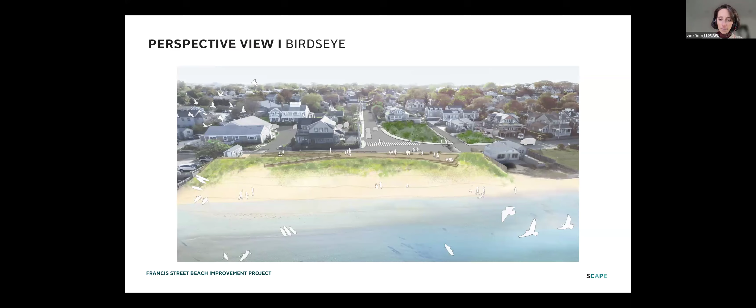Just going back at the plan, I'll pause here and let you all comment if anyone has any comments, questions, or if Laura or Kate have anything to add about the design. But that's kind of where we are today.

I would just add one nuance: if you click to the prior plan, Lena. So one thing we were discussing last time, you see how on the left side of the screen the boardwalk swings out and starts to go closer to the water. We fine-tuned that a little bit for a couple of reasons. One, to give a little bit more breathing room and flexibility for potential future connections, so it's not quite so tight, both with the stair and the edge of the boardwalk up against the neighbor's property. So you get a little bit more dune restoration planted buffer in between that existing fence for the near-term condition.

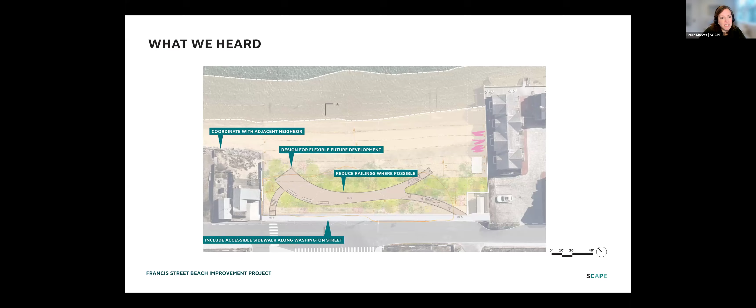It also better sets up a potential future extension if that's desired, that would be in an alignment that works with best practices for grading of the dune and alignment of the boardwalk. So if you click forward, you see that left side edge of the boardwalk is still offering flexibility in terms of how an extension could happen, but pulling back a little bit more roadside to stay out of the resource area as much as possible.

So yeah, we'll just pause there. The next piece is talking more about stormwater. So just pause there. Any thoughts or comments as we advance the design?

The right mix. What did you say, Nat? I said, I think we found the right mix, although this next thing looks different than the last one. So what are we doing now? Or is that something else? This picture that you just...

This is just simplifying the roadside edge to be more of a straight line. The reason for that is more constructability. It's going to be easy. We maintain that kind of sinuous curvilinear feeling towards the water side, but it makes it a little bit easier for construction and also for pulling the boardwalk back towards the road as much as we can while still creating that kind of buffered edge.

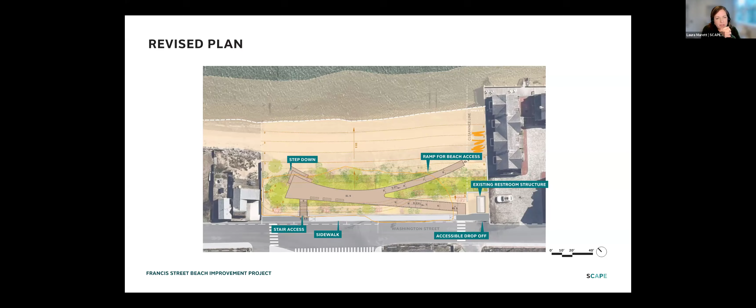So if you go forward to the images, I think the Francis Street beach view or the Francis Street road view is helpful just to get a sense of what you're seeing. So you'd see the boardwalk kind of floating above that restored dune, and hopefully still have that view to the horizon and the water beyond. So we're just fine tuning the way these two systems - the dune with its optimal grading and the boardwalk with a nice combination of simplicity, constructability, and that nice curve swoop - come together.

It's all warm. It's all done, you know. Clearly. Are you, well, thank you. I mean, you've made it through the comments phase, apparently. You've survived the comments phase, and apparently everyone is pretty happy with this. And okay, cool, we fixed the bathroom issue, the secret bathroom from 19, whatever year. It's there, we have it, so.

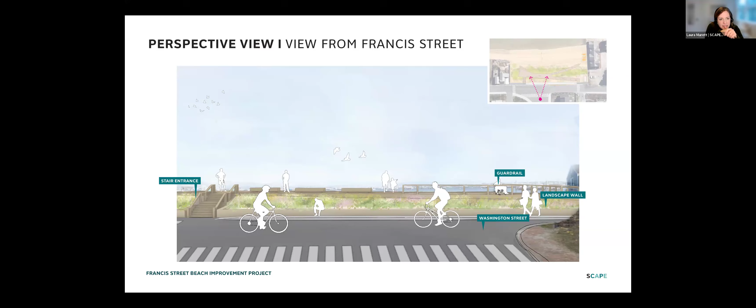And I like the connectivity piece and having a way to step down from those spots is important. Maybe click back one, Lena, so we can see that view. It says that in the last slide, right? Mhm, step down. So in other words, where it's gonna end isn't just gonna be like Route 93 in 1975, right? Exactly, forever. It gives you a connection down.

A set of stairs that can be removed if and when the day comes to add more, finish it, or go to the next parcel. Okay. And I think these beachside stairs could remain, we can look at how they align on the neighbor's edge, but I think it's nice in terms of, we were really trying to think about what is the optimal view as you're looking out towards the water. Obviously, you don't want to be facing too much back towards the bulkhead at the neighbor property, but more out towards the water and towards downtown. So I think starting to get there. Can I ask you? I just thought of something.

I can't remember how it was worded in the previous slide about more benches, less fences, or whatever. That's good. Having benches is better than having just a fence and bench, right? Because the benches are acting kind of as a fence a little bit. You want to have as much sitting area as possible, because that's going to be the most important thing.

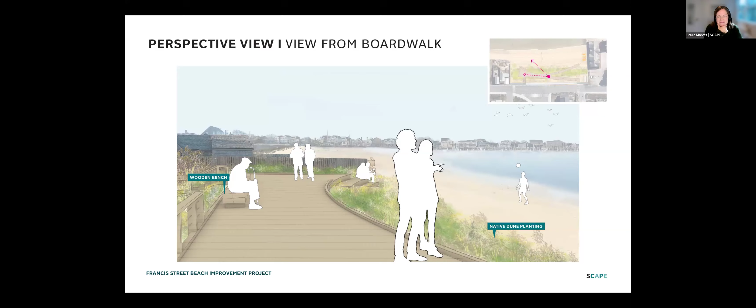Today we scheduled a meeting with Chris Wolf, who owns Put In and the Cuddy, the adjacent abutter there. So we'll be meeting with him in about 10 days to see what he's thinking for adaptation and how he could tie into the project before we finish this 30% design phase. I think he seems really interested, which is great. Great.

We've been able to get some stormwater modeling done here. I'm sure almost everybody on the call is aware of what we're doing, but just as a high-level overview, here in Washington Street, our main modeling goal is to characterize the extent and depth of street flooding, look at how the drainage system modifications we're proposing would impact that flooding, and then look specifically at if rain gardens or similar infrastructure would help alleviate that flooding.

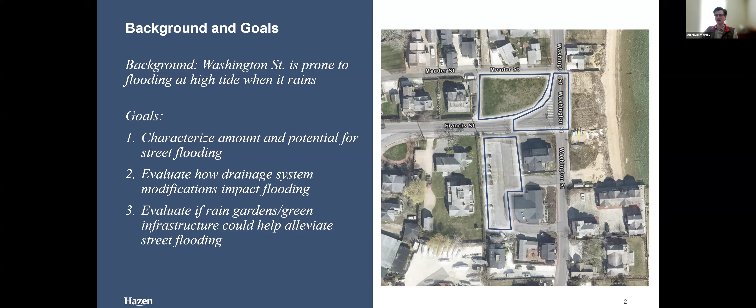I want to highlight that we're looking at flooding specifically when it rains at high tide. That's the condition under which flooding seems to occur now. It's also more similar to future conditions where sea level is higher, and it could be that rain at not-high tide would cause flooding as well.

We've done a number of scenarios already. Scenario 1 is the system as it exists today. Scenario 2 is the same, but with tide gates on the outfalls on Francis and Meader Streets. Scenario 3, we did 2 versions, but it essentially includes a little bit of stormwater drainage infrastructure and the rain gardens themselves. We'll see that in a minute.

Our modeling approach, by the way, everybody please feel free to shout out and stop me if you have any questions along the way. Our modeling approach is utilizing industry-standard design storms, which are appropriate for this geographic region.

We're modeling only 24-hour storms. We looked at the 1-inch, 3-inch, and 5-inch 24-hour storms. Those correspond approximately to a 6-month, 1-year, and 10-year storm respectively. We also looked at the 2-inch storm, which is like a 9-month return period, for the rain garden scenarios, just to dial some things in.

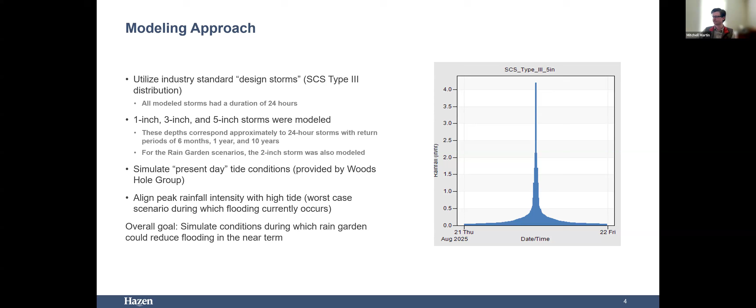As I mentioned before, we were aligning the peak rainfall intensity. You can see the graph of rainfall intensity for a design storm on the right on the slide, aligned with high tide, which is the worst case scenario.

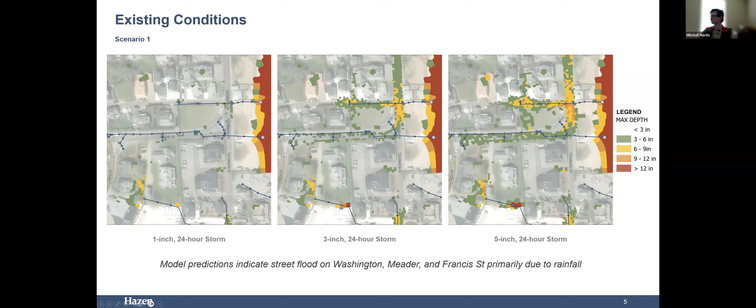Under present day conditions, there's not a terrible amount of flooding for a 1-inch storm, with a little mostly nuisance flooding at the intersection of Meader Street and Washington Street. For the 3-inch storm, approximately a 1-year storm, flooding gets more severe, with some pockets up to a foot. And for the 5-inch storm, the flooding is significantly worse, with some serious traffic impacts almost definitely.

This is that same 1-inch storm, just larger. We can see Francis Street, Meader Street, Washington Street—all the main streets here—are perfectly passable in this condition. For the 3-inch storm, not so much. For the 5-inch storm, definitely not.

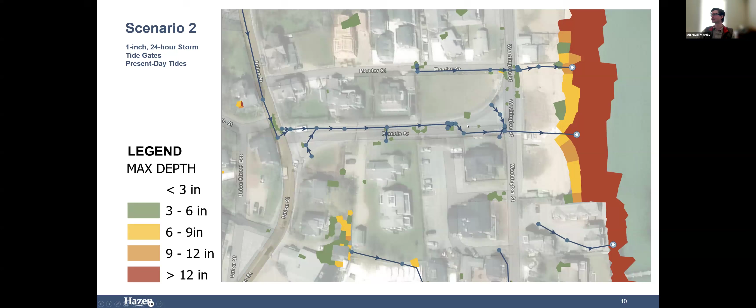This is those same scenarios, but with tide gates on these 2 outfalls. Under these conditions which we modeled—these storms without storm surge, with present day tidal conditions—the tide gates don't seem to have any real effect on flooding. You can see that these results are broadly identical. That, of course, will change with future tidal conditions if the tidal conditions are higher. Again, we can look at them one at a time here and see basically the exact same things.

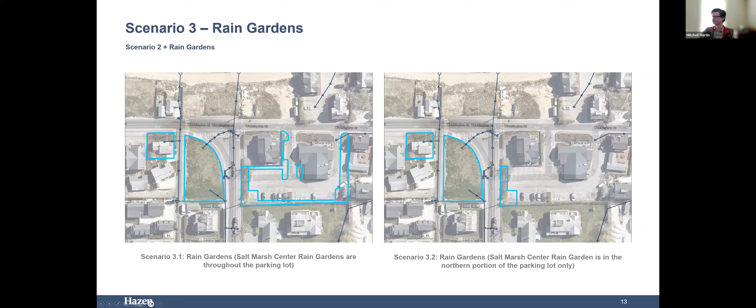The way that we modeled these is quite optimistic. We took the best case scenario side slope if you were using earthen slopes, and assumed no decorative stones or decorative grading inside these structures, so they're just prisms. Then using the boring data from Tighe & Bond from last year, we took the highest groundwater elevation.

Used that as the bottom elevation for all of these rain gardens. For the purposes of modeling, we didn't include any infiltration during the storm. That's a common industry practice. Generally speaking, when you have a rain event, the groundwater is also going to be quite high, so we are assuming that during the storm itself, you're not going to get any water leaving these rain gardens into the ground, which is slightly conservative, but standard.

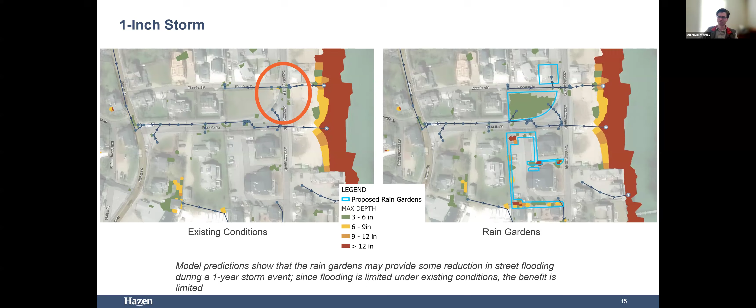It is a little difficult to see here, but if you look specifically between Meader Street and Washington Street in this intersection, you can see that there is some reduction in flooding extent. And there appears to be an even larger reduction in flood volume, but to a small extent, which is quite diffuse.

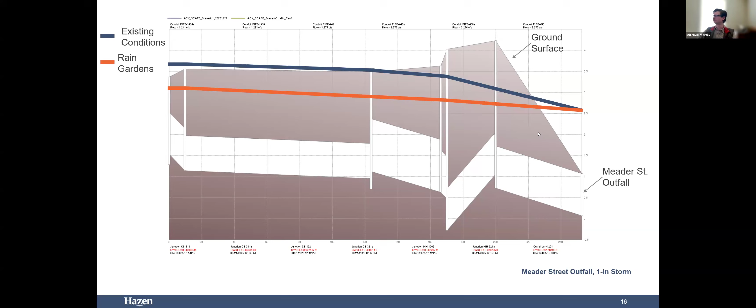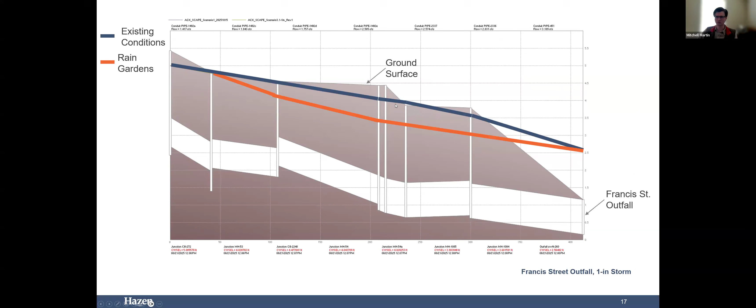This is actually a great result for the 1-inch storm, and very similar results here on the Francis Street outfall, where it's quite close to the surface in some places, but you get almost half a foot difference in a lot of other places.

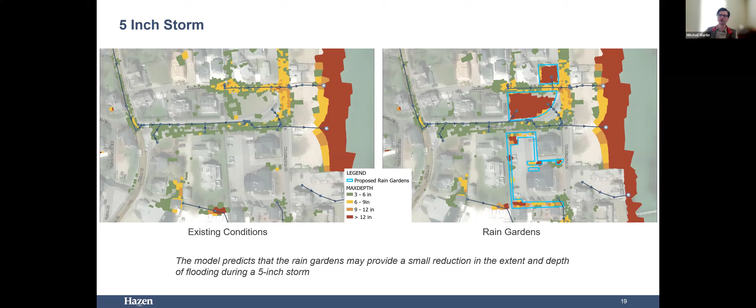Now, the reason I didn't show profiles for the 3 or 5-inch storm is because the surface flooding is pretty extensive for both of these storms, and there is still an improvement in terms of the hydraulic profile, but it's a lot harder to interpret because there's a lot of overland flooding that can interact that way.

As I was saying before, the smaller Salt Marsh Center rain garden ends up having essentially the same benefit to the rest of the system on Meader and Francis Street. It does, of course, make some difference further down Washington Street, down on these maps and in these pipes over here. But that was sort of beyond what we were looking at in our modeling.

The overall message is basically that these rain gardens, especially the ones on Francis and Meader Street, have the potential to decrease the depth of flooding and the extent of flooding some during smaller storm events. They have a measurable benefit for larger storm events, but it's not necessarily one that would be appreciable to someone physically there in person.

The Salt Marsh Center parking lot rain gardens, having a little bit of storage, especially along Francis Street, looks to be beneficial, but going above that, it doesn't significantly impact Francis and Meader Street.

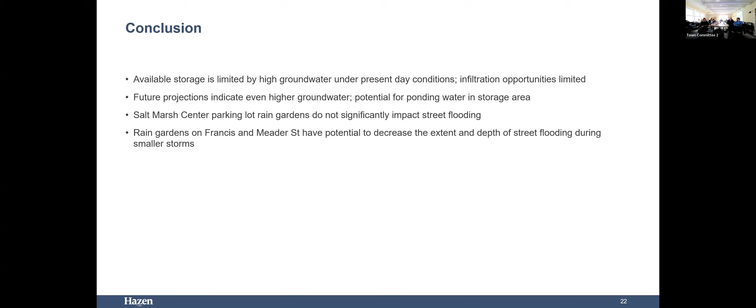Question: how does the water get into the storage at the Salt Marsh Center? Does it roll in off the because that's higher? Is it rolling in from the parking lot or?

Correct. The Salt Marsh Center rain gardens are, as you can see, so these points and lines represent manholes, catch basins, and pipes in blue. There's connections for these other two rain gardens into and out of the system. For these, the actual surface elevation is higher than Francis Street. So any water that's coming in here is originally either falling on the roof of one of these buildings or it's falling on the parking lot itself and running off.

Joe, go ahead. Yeah, thanks. Mitch, I think I noted in your maps and what you were saying that in some of those larger events, while the extent of flooding might not change that much, the volume was a little bit reduced when you had different levels of rain garden interventions. Do you have any sense of the flooding that's still going to occur on Washington and Francis? Is there any effect on drainage time for those areas that are going to be flooded in the road?

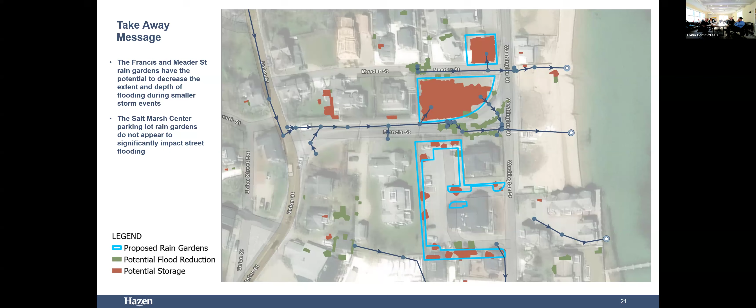I didn't see that. And the question I was asking Dwayne also is when they show the Washington Street where the flooding is, that kind of rings true to me, but I'm not down there as much. When they're showing these, it's kind of around the corner. That is kind of what I'm seeing. Nat knows it comes up through the catch basin first, so that's important. Okay, they know this though, I think, Laura.

Yeah, I feel like we're talking about a shorter term benefit as the town mobilizes for pumping and a longer term strategy. So it's a question of how you want to invest in this, right? But there is some short-term benefit for the smaller storms. And Todd, I see your hand too. You want to chime in on that? Before he does, that's not dissimilar to the approach that we're taking from the coastal side too. We're not trying to solve every single major storm. Yeah. I don't wanna talk over everyone, but what Dwayne just brought up.

Okay, so the catch basin, I know we're not on Easy Street, but I have to say this because this is what happens. The catch basin in front of LeMaitre's little store, whatever we're calling it this week, that store changes a lot. That catch basin is where the water comes out. Because the outfall part, when the water gets high enough, the weight of the water, it's just like you could take a clear hose. It's not really complicated science. You don't have to go to college to figure this out. And the water pushes itself out of that catch basin because it's so low.

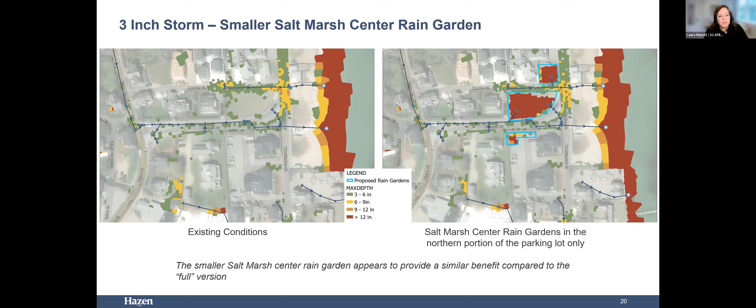I could jump in there. So what Mitch and Ben and the team did for this initial run was a very simple maxing out: if you went from the edge of the space on a 3-to-1 slope down as low as you can get it while being above groundwater, what storage can we get?

So from a design perspective, with your direction today, our next step would be to say, okay, we want to not just make it a ditch, we're going to finesse the form a little bit to make it more attractive, to think about areas where we want plantings up a little higher. So the manipulation of the ground will reduce somewhat the capacity.

What you're seeing here is a maxed out capacity if you just took as much water as you can into these spaces. So we'll be able to do another model run once there's a refined design, provided you want to continue to advance this study. Does that answer your question, Leah? That covers what has been said, I think. What Dwayne said, pretty much.

I had one additional question. My question is about predictions on water levels and groundwater modeling. I just wanted a bit of a refresher on what's been done in this area and what the expectations are for low, medium, high sea level rise and impacts on groundwater, or other potential impacts on groundwater.

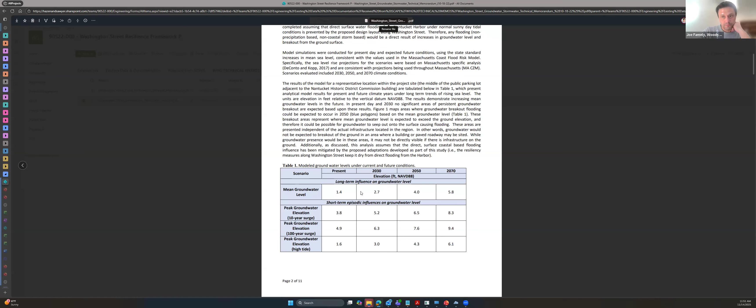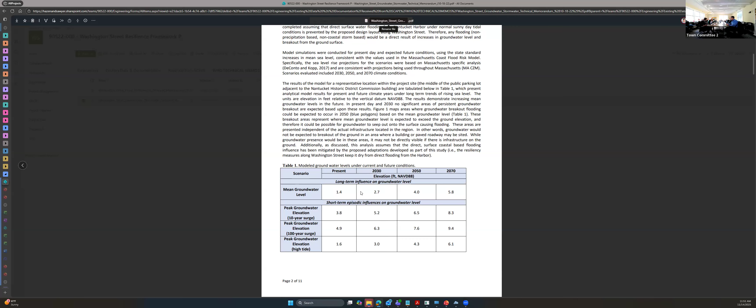The boring locations, do we have monitoring wells installed there now that we can access? We do? Where are they? They're up the land, like the bank. I don't know where they are either. We should go for a tour. There's one right here, and then the other boring was here, and there was one in the parking lot, but I think this one has the monitor.

So there's a well, is it locked? Can I get access to it and start monitoring? You can talk to Liz about monitoring it, because she's doing it. Oh, she is doing it? That would be great. So we have our own. Can we save money? You should just talk to Liz about it.

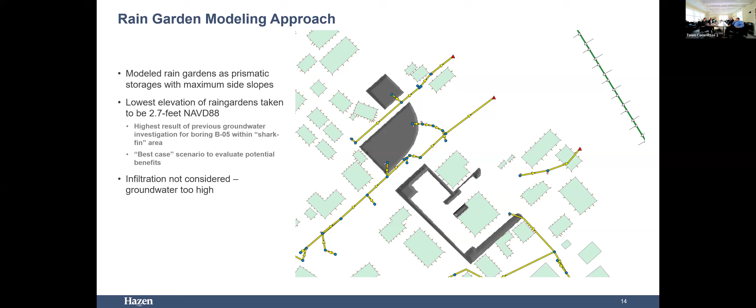Okay, I do want to add two things since we're talking about groundwater. The town is underway with a groundwater nutrient loading model project right now, and that's for Nantucket Harbor, so we'll get some information from that. I'm also working, for the Easy Street project, on trying to create a model for groundwater table rise within the downtown area. That's what I was asking. What data are you using?

That's what we're trying to figure out, because there's not a lot of historic data other than the USGS data from 1990, and there aren't a ton of wells that actually have data. Are those with the water company? Because they have wells too. Mark has some wells, but not in the downtown area. And he was working on a model, but that's been paused because all the funding is going towards PFAS, so he wasn't sure of the timeline. His model's island-wide; this would be more specific for the downtown area.

Last comment from me, I promise, on this. Because now we're in a simpler way of talking about the water issues instead of stuff that's crazy expensive and down the road. Raising the street, I want to get back to that again. I just can't not talk about Easy Street, because that's the street where the water starts coming in. All the videos get put online and we're all gonna go underwater and everybody's gonna have to evacuate. I hate listening to it, but that's what gets said.